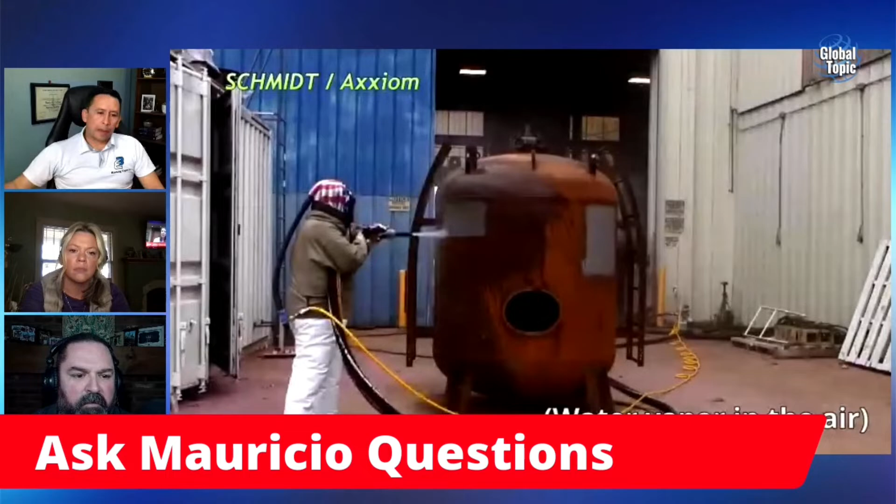And there are some big players in this business, dry blasting and wet blasting. And we are married with Schmidt, who is one of the leaders around the world. So what they did, they built a unit. Maybe you have a video. Yeah, let me bring the video up here. And so we're watching here. Go ahead, cover this.

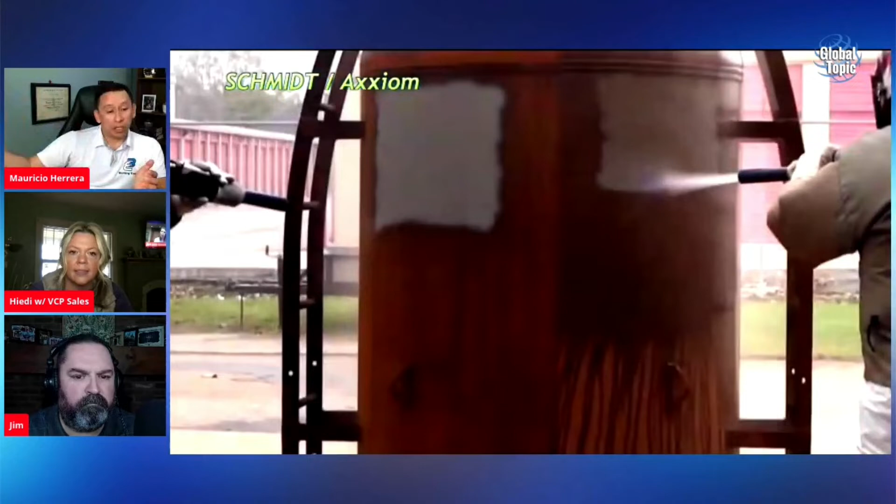Absolutely. So what we are showing here is just a guy doing wet blasting, and it's beautiful because no dust. The speed is the same as dry blasting, and the process happens just as you do dry blasting. Then he will show dry blasting on the other side, and here we are showing both at the same time. With dry blasting, you can go a little bit faster sometimes. It depends more on the expertise of the operator. Basically, it's the same. But then what happens after is what you need to really think about.

Because with dry blasting, you will be basically ready to paint. With wet blasting, you will have the flash rust. And then you will have to deal with it. Your inspector will have to test and tell you if it's acceptable or not. The supplier of the paint, usually they are very picky about it because obviously the adhesion and all the things that they need on the surface could change if they have corrosion on the surface. So those are the things that you have to keep in mind.

And so these guys from Schmidt, they were smart, and what they did was to integrate one standard blasting pot, the most popular they have, and they put an extra system that allows the machine to do wet blasting or dry blasting. So it's a perfect combination because with that machine, the contractor will try to do as much as he can dry blasting, but in case he needs to do wet blasting, then he just moves one little button and does it.

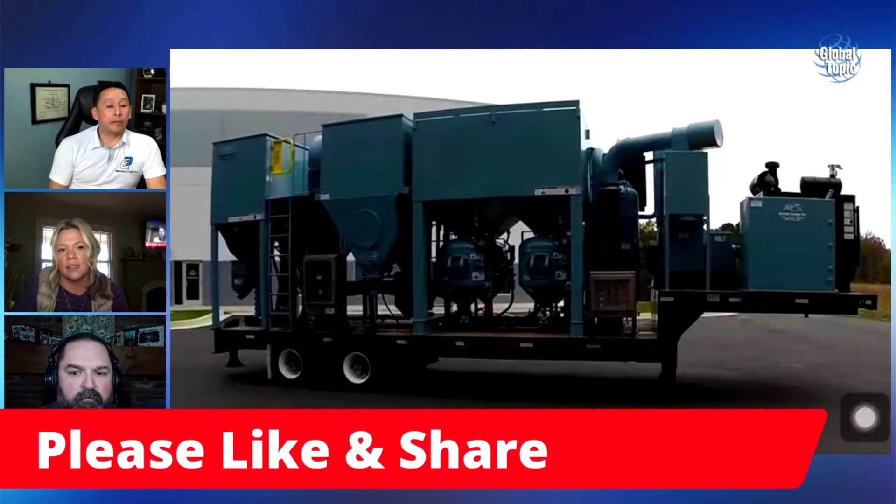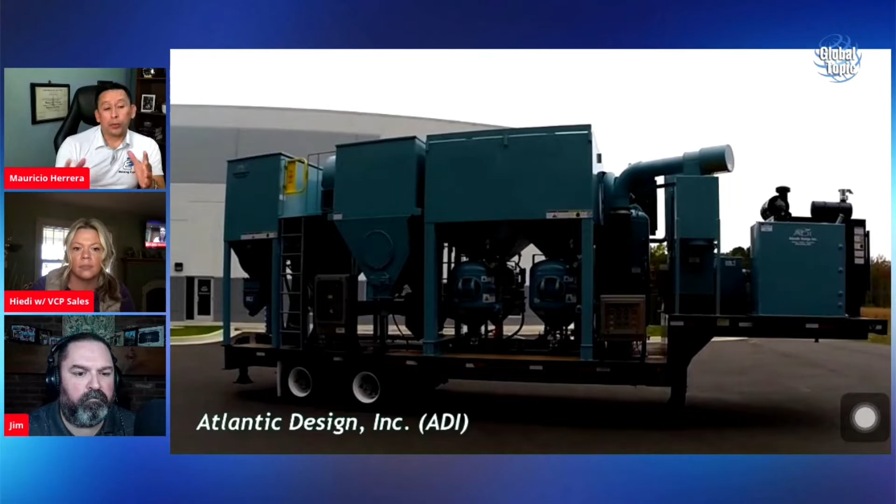So, looking at the aspect of mobile systems, I have a video here from you regarding ADI's trailer. Would you want to go through that as well? Yes, because when you use dry blasting, then you will have the challenge of abrasive. What to do with those big amounts of abrasive that you need. But in the market, now we have big pieces of equipment, beautiful equipment like this trailer, produced by Atlantic Design, where they put together a high-performance blasting pot.

Then they have a pump that will do the vacuum for you, so you can have 2, 4, 6, 8 operators doing the blasting, and 1 or 2 vacuuming all the material that they are throwing. The machine cleans the abrasive automatically and puts it back into the blasting pot, and all the dust created is separated into another compartment.

So with this kind of unit, you basically connect your compressor to it, and then you have 4, 6, or 8 operators to do the job. This kind of machine is used for big projects such as storage tanks and big vessels, but it always depends on the main factor, which is investment.

So people have to balance this out and say, okay, do I have enough money in this project to invest in this kind of technology, or do I have to go with wet blasting, dry blasting, and an alternative abrasive. Those are tough decisions for people that don't know much. So it's important to have all the information available to make a smart decision.

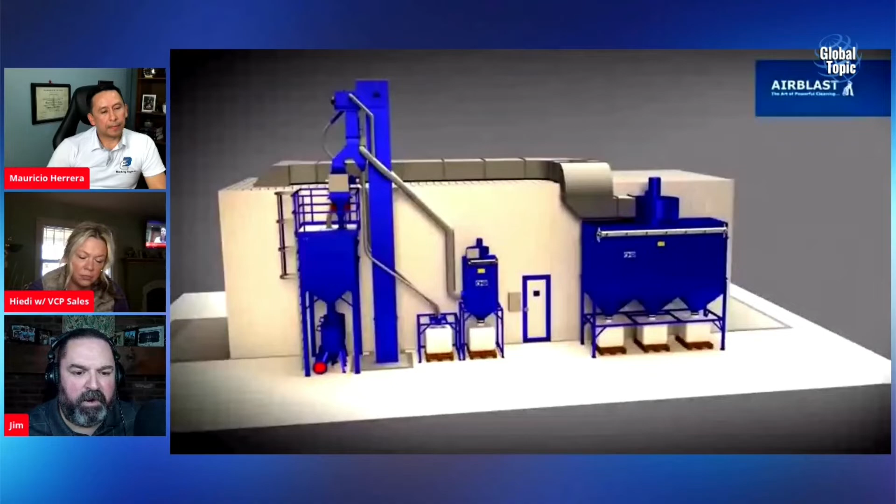So in addition to that, the other thing I'd like to bring up is, obviously, blast rooms as well. Absolutely, yeah. When you're in a big project, you don't need to do everything on the job site.

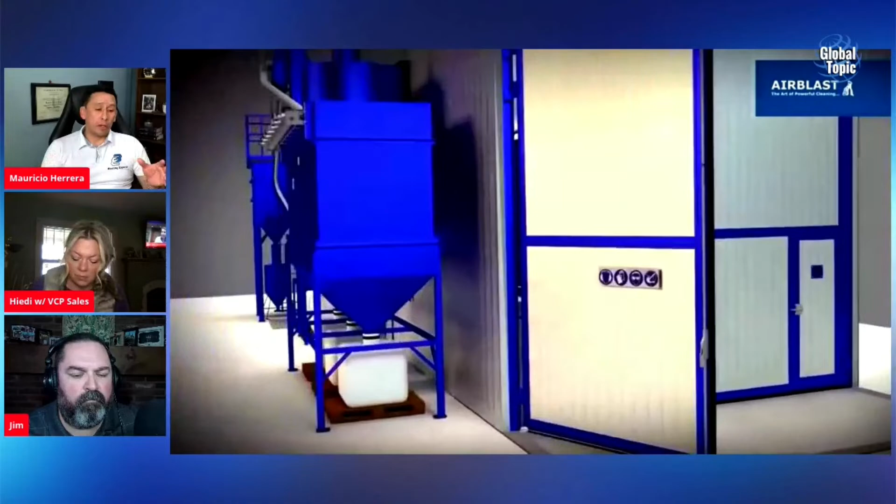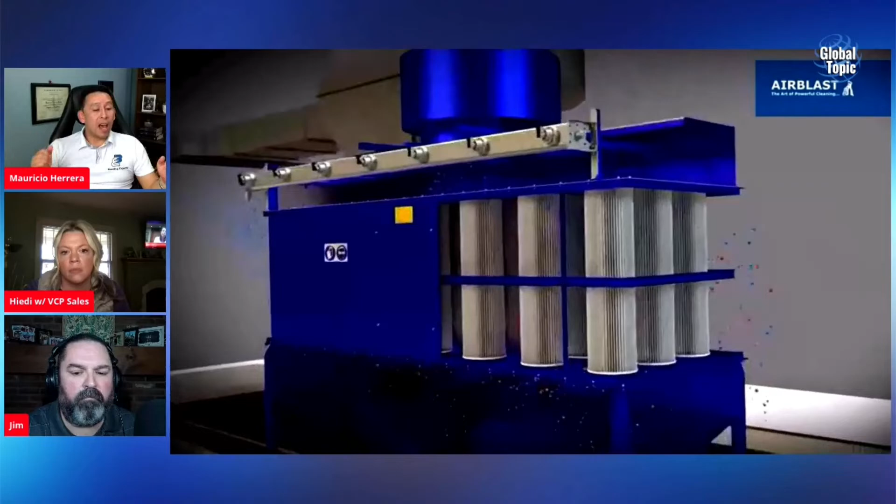You can actually prepare those components inside, at your facility. In those cases, we always advise owners to invest in a unit like this, where you have a cabinet with all the components, the dust collector, the recycling system, everything in it, and then you can use steel shot and steel grit, because that's one of the keys.

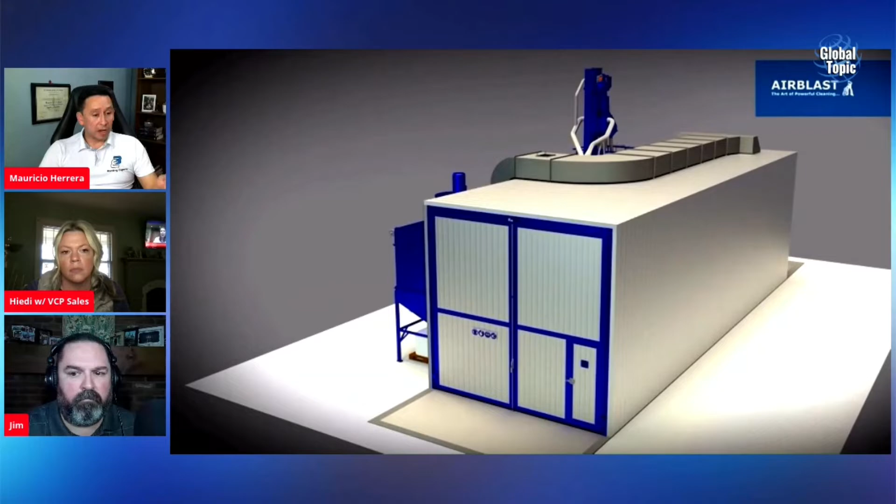Whenever you can use steel shot or steel grit, mostly steel grit when you are doing hand blasting, you will have the opportunity to reuse that material hundreds or thousands of times. So the investment in abrasive goes to a really low price compared with sand or any other abrasive.

So these rooms are a perfect solution for a big manufacturer who needs to prepare components before they go install them. Absolutely, very good.

Very good. The other topic I'd like to cover, or have you cover, is regarding water jetting. I encounter that a lot in certain specifications, and I know in Latin America it's used a lot. Could you talk a little bit about water jetting?

Absolutely. Similar to wet blasting, they have been taking advantage of new coatings and inhibitors, but this specific technology is used when you have thick layers, let's say more than 20 or 25 mils. With a process like dry blasting, it will take forever, or sometimes it's even impossible because it really melts. When you start blasting, it melts and it's hard to remove.

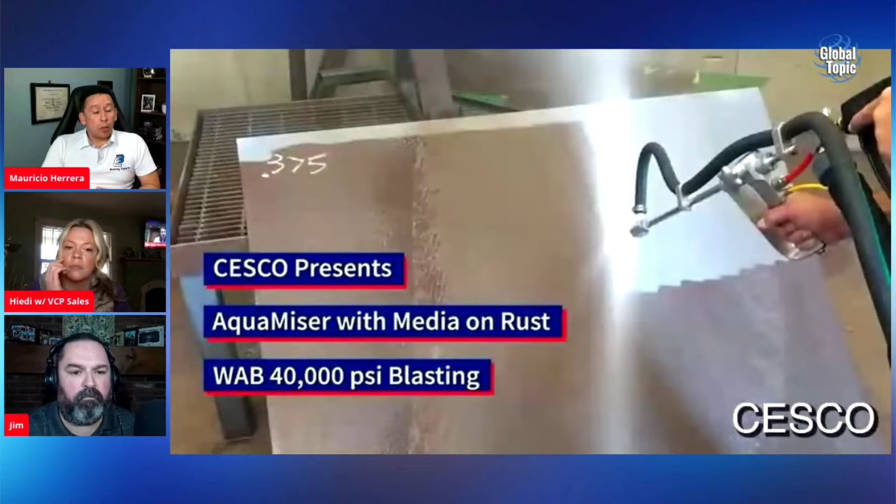So those are the kind of opportunities when you use water jetting. And for water jetting equipment, there are some big manufacturers of this technology here in the US, and also in Germany, and even in Brazil there is one as well.

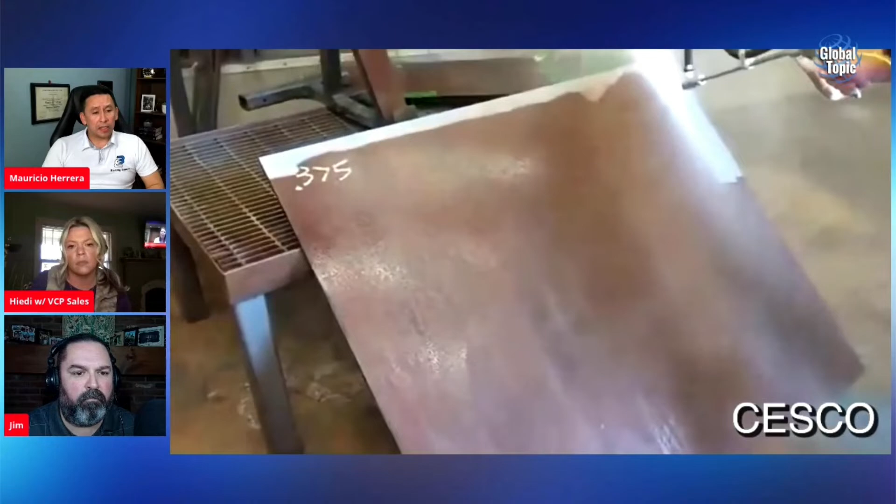We were looking for the right supplier, but we were lucky to find the Fulmer family in South Carolina, the owners of CESCO. They did something really smart—they had been doing something similar to blasting experts, selling technology for surface preparation. So they understand perfectly what dry blasting is, wet blasting, and water jetting.

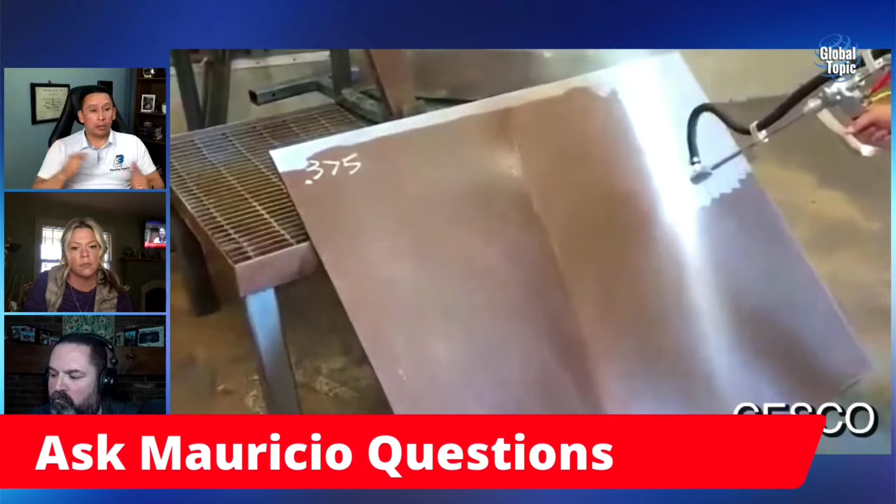So what they do is offer water jetting equipment. And you know that with water jetting, you can shoot at 5K, like 5,000 PSI, 15,000 PSI, 30,000 up to 40,000 PSI. With that pressure is where you can do basically everything—you can remove whatever you want.

But the challenge is that water cleans but doesn't penetrate steel, so you cannot create profile. So what AquaMiser, the division for water jetting at CESCO, did was combine dry blasting equipment, a blasting pod from Schmidt, with the whole pressure system, and integrated it with the water jetting equipment. So now they have a machine that, if you want to do just water jetting at 30,000 or 40,000 PSI, you say water jetting. But if you need to create profile, you say let's use the injection system with the abrasive.

So that's the difference we offer compared with other manufacturers—that's the plus part we offer to our customers, to have a water jetting piece of equipment, a good one, with the injection system on it, so you can create profile.

Mauricio, when it comes to larger painting projects, how can contractors minimize the starts and stops to control proper levels of abrasive media? Yeah, great question. That becomes sometimes the worst part, when you waste more time trying to load abrasive to your blasting pods.

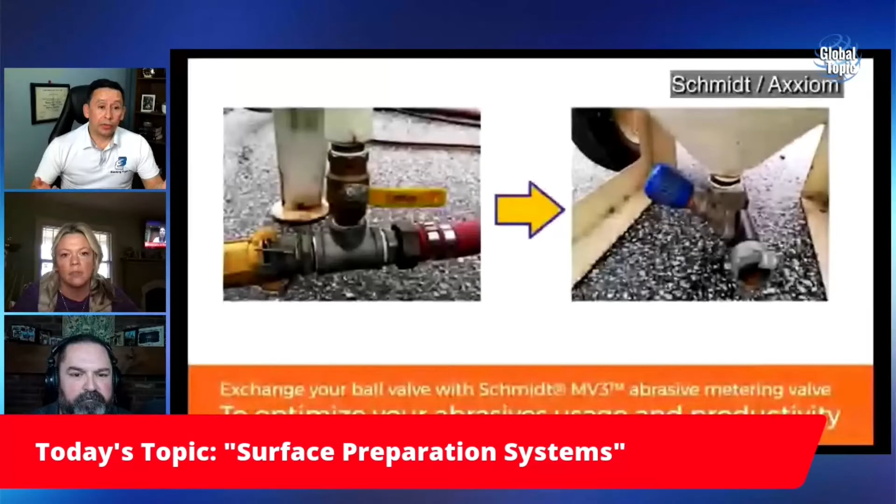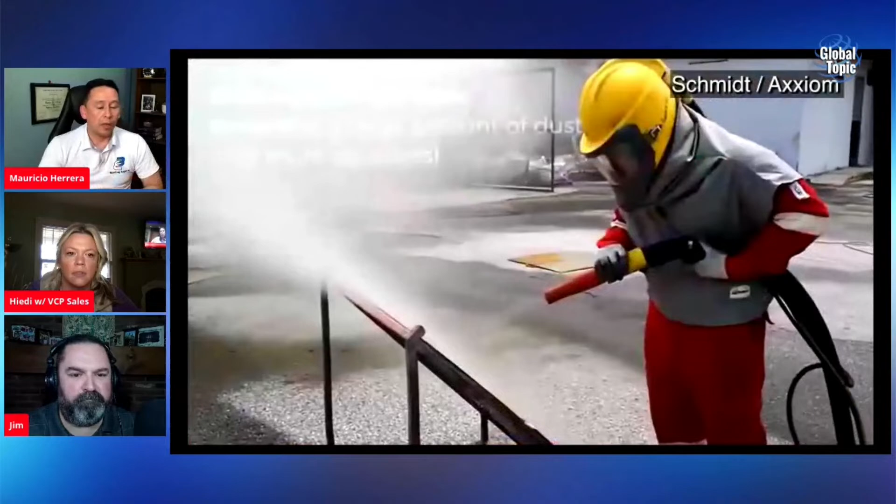Absolutely, so everything goes together. That's one of the things that when I was trying to prepare what to say in this live, I was going through the history of our company. One of the best things that happened to us is we didn't have to go to university to take classes, because we got the opportunity to get trained by the manufacturers. We got training from Kennametal to select the right nozzle, and training from Schmidt to understand what you can or cannot do with a blasting pod and what systems are available.

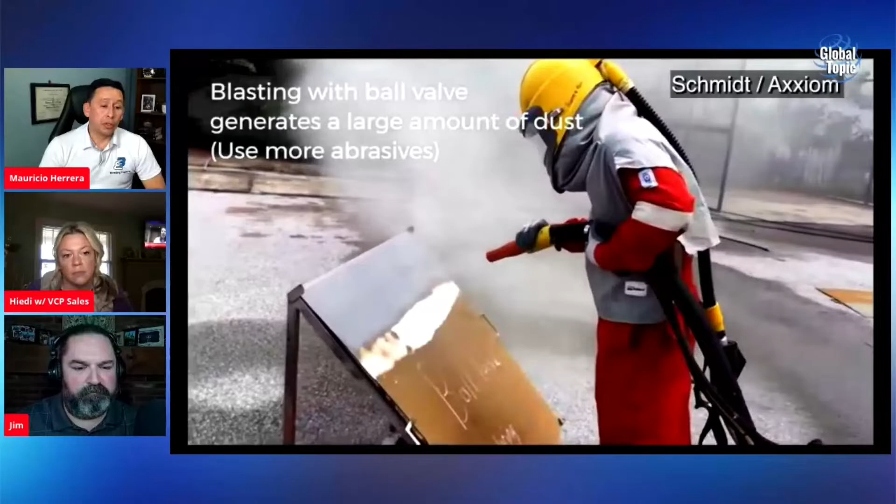We learned what kind of PPE to use, basically everything. And one of the things is that abrasive, you decide what kind to use depending on what machine you are using, or what the specification says about pollution, or what kind of profile you can create. So there are different parameters that help you decide that.

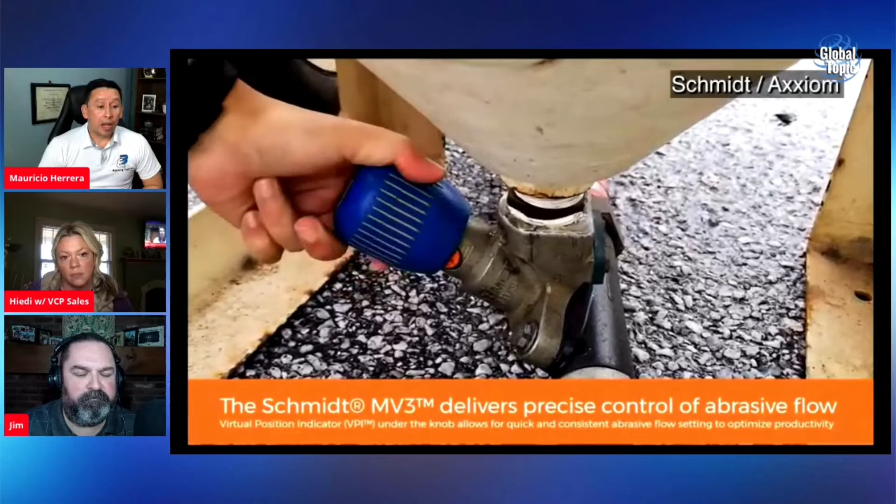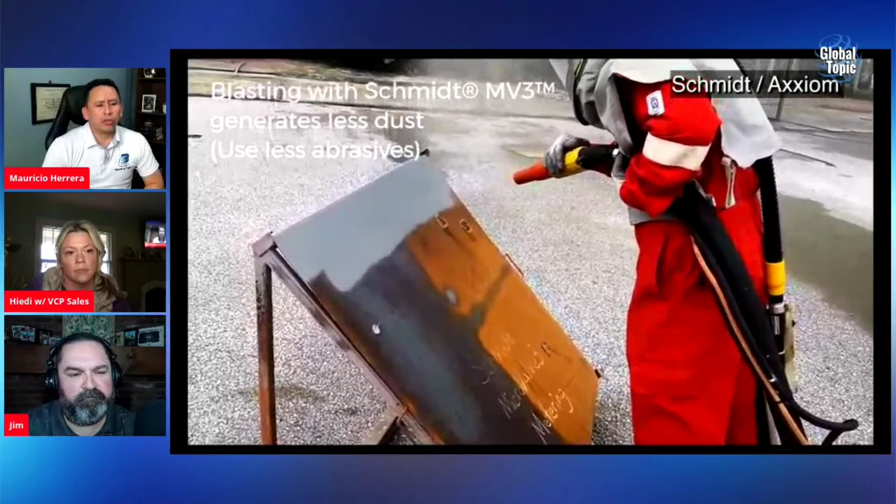Obviously the first one is the profile that the coating supplier requires. Usually a typical one is in between 2 and 3 mils. So with that information you say, okay, I can select. If I am using grit, I will go with a manual process, I will go G25, grit 25 size. If I go with Black Beauty, I will say medium size. So with the profile, you decide what size.

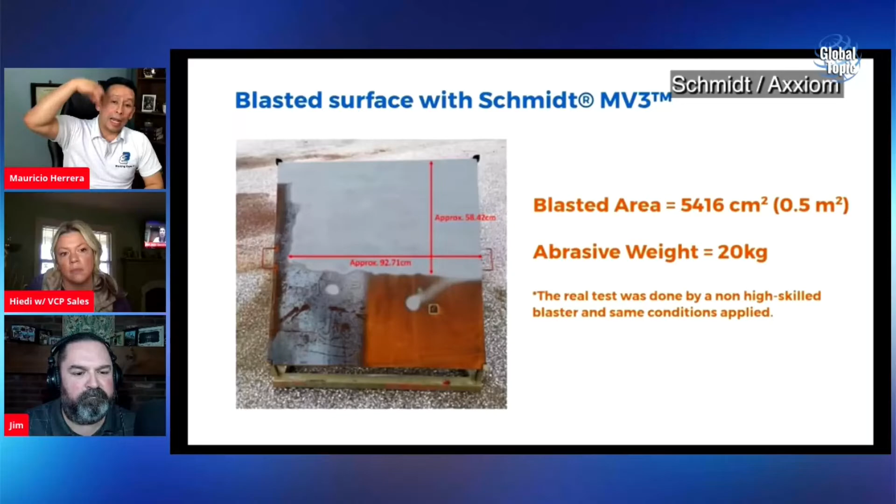But then with the equipment you are using, you decide what kind you're using. If you have this trailer option that Jim showed us before, you will go with grit, still grit, because you will be throwing, vacuuming, cleaning, and throwing again, so you will have hundreds of times to reuse it. If you don't have those systems, then maybe you will go with Black Beauty, you'll just throw it once and keep going. So it depends on what kind of equipment you have and the specifications the owner decides for the project.

You truly are an expert. Oh no, that's a beginner. I feel I need 50 more years to learn all the things out there, because there's a lot of information. Jim knows how much information is out there, so it's a pretty extensive topic.

ROI speaking, a lot of these decisions are based on return on investment. Have you performed or done any financial analysis for these? Yeah, I like that kind of question because that's what most people do, so that's what we do. I have a good example for it, especially for our Latin American customers, who are used to using sand and don't want to use a blasting pot that is certified.

They just go to their good friend who is a good welder and they build a blasting pot. So instead of investing maybe $3,000 to $5,000, they end up investing $500.

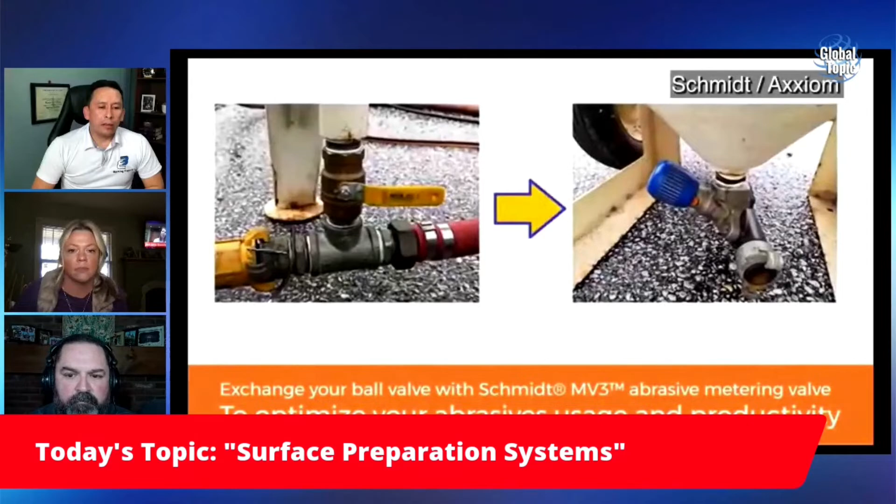Yes, that little part, the one you just showed. One little difference, and you can stop the process right there. Stop it a little bit before, right there. So we have a blasting pot that was made with, as you can see, a water valve.

And then they have a T under there to get the air and then the abrasive from the blasting pot. It works. That's the problem, that it works. You can do blasting with it.

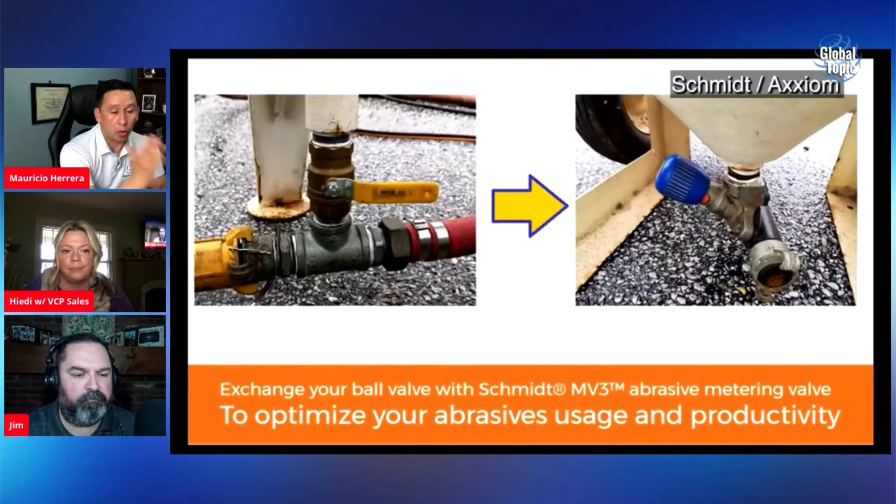The problem is that if the operator is lucky, instead of doing, let's say with a nozzle number 6, he can do maybe 1,000 to 1,200 square foot. Normally they can do that if you have the right compressor, the right dryer, the right blasting pot, and the right components. But with a machine like this, you will be lucky if you do 600 square foot.

So when you do the math, 600 versus 1,000 - 400 foot of work could mean $200, depending where you are and how much you are charging per square foot. It could mean $200, $300, $500 per day.

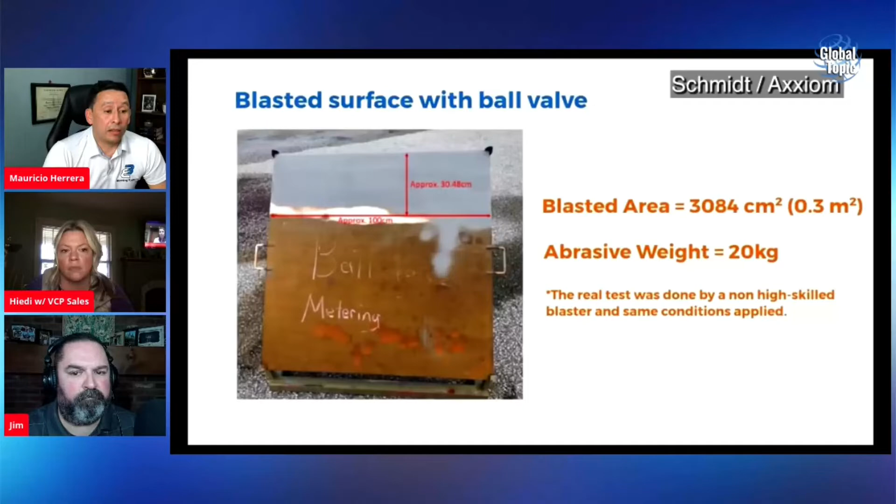So basically, in one week, you can recover the investment of a certified blasting pot instead of the one you decided with your friend.

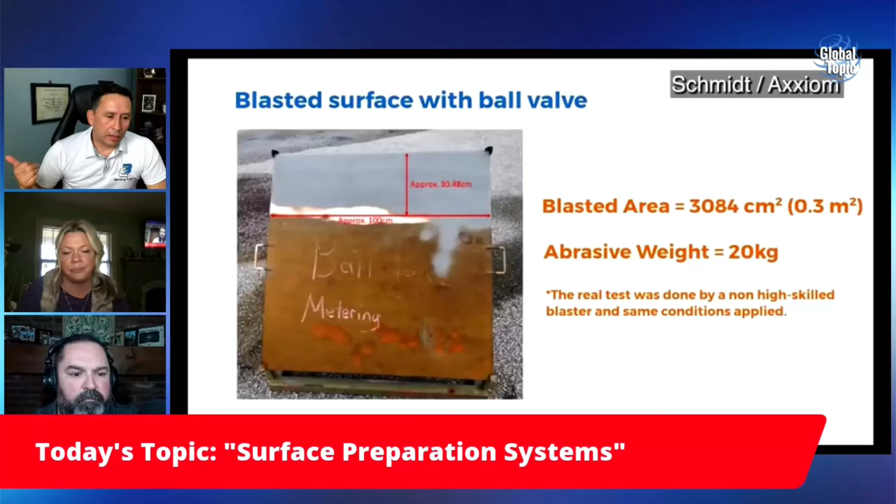And then safety, that's another big thing in this kind of products. The blasting pot that your friend built for you, there's a chance it will explode and kill someone, and then you finish everything, right? You'll end up, I don't know, in jail. Lives are invaluable.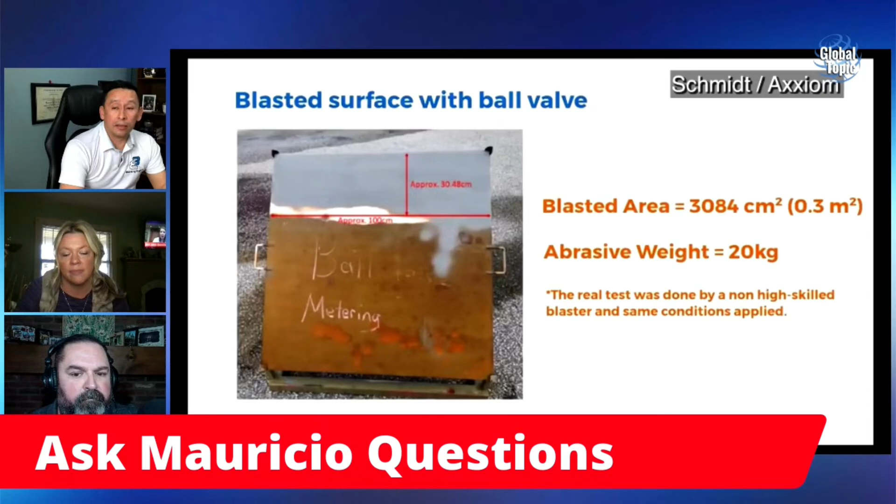Yeah, so if you use a certified blasting pot, you know that these manufacturers go through all the process. And what I like a lot is that in North America, manufacturers have to follow procedures and standards, and they cannot just come up with any solution - it's something that is certified.

Something that video shows as well is the amount of abrasive you can use. With a normal blasting pot built by my friend, I could spend twice the abrasive I'd spend with a certified blasting pot. So those kinds of analysis, we have detailed numbers and examples to show our customers - that's what we do for return on investment.

Very good. The one thing I think before we end this stream, we should talk about safety and talk about PPE. Would you like to go through it? I'll bring up the clip we have here regarding configurations.

It's great that you include this topic in this slide, because sometimes owners and contractors get really excited about the equipment, abrasive and everything, but they forget about their people - the most important thing they have in their company. And PPE, luckily for everyone, there are companies developing accessories to help.

And there are also standards that people have to follow. That's a challenge we have in Latin America, but with the good information we are promoting, and with institutions around the world that promote safety, it's a lot easier.

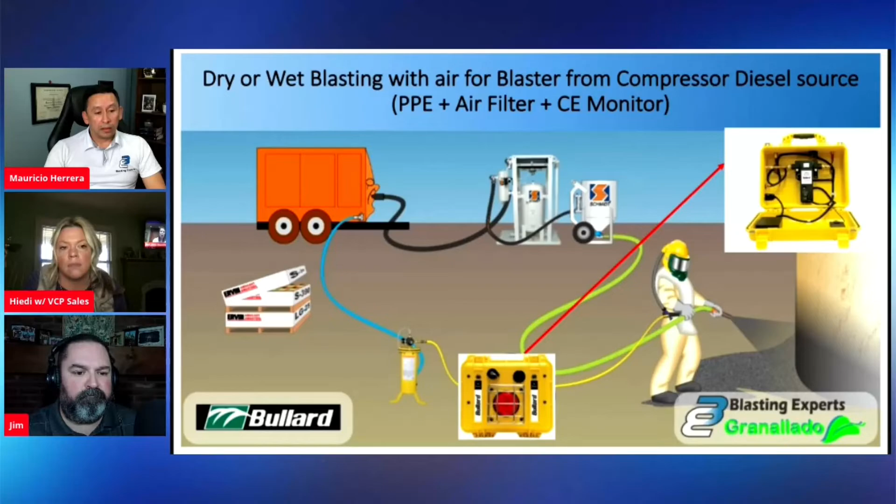So the best is to use this respirator, this helmet. They come with this hose that is feeding them good air. We call it air class D. That is the one that you need to breathe normally. And then with this kind of helmets, the operator is basically with the ventilation system working, no problem. One thing I like about Bullard is that this helmet weighs a little bit more than 2.5 pounds. We have some others that weigh up to 5 pounds. So that is what I promote in these cases, light helmets.

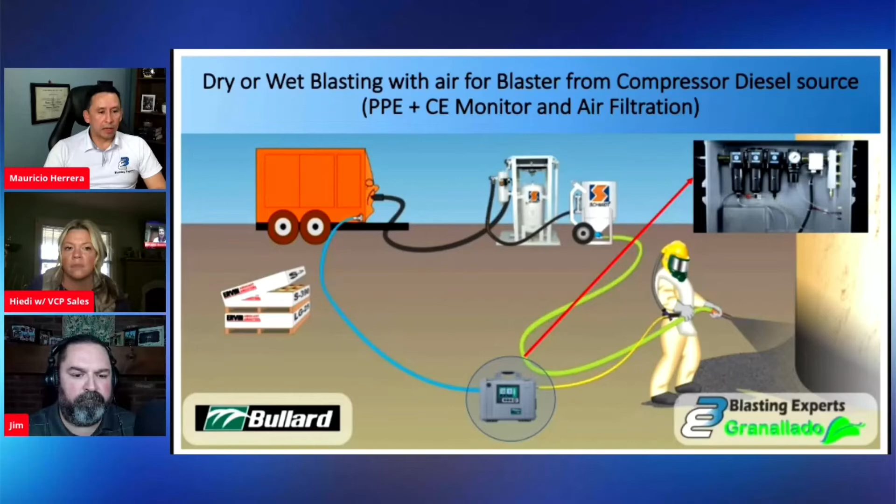And then you have also the blasting suit that will protect you from the rebound, and obviously your safety shoes and your gloves. So that's basically the PPE. This is one of the configurations. We have another one here that Jim is showing. So instead of installing a filter and the CO monitor, we have this box now, a new one. It comes with everything. It has all the filters inside that will clean your air, and it has the CO monitor that will tell you what happens. And it comes with a screen so anyone is able to see anytime what is happening and tell the operator that everything is safe. And if the CO level is too high, it will sound an alarm and will stop the process. I don't know if you have another one there, Jim?

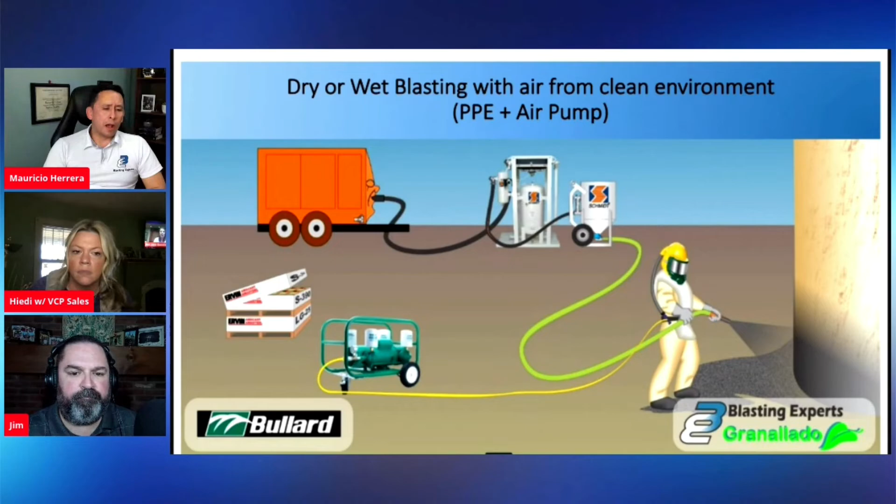Yeah. So this one is even better. So the contractor knows that his compressor is quite old and it can produce problems, right? So he said, okay, I'm going to install a pump. This one is an electrical pump that will take the air from the environment and will throw it to the operator. And if you show another one that you have maybe there, Jim, in cases where the air that you are sucking with this pump and throwing to the operator, you are not sure if that's safe, then you put this box here to make sure that you clean it, and in case you have any contaminant, it will inform people that something is happening. So those are basically the PPE solutions we have for surface preparation.

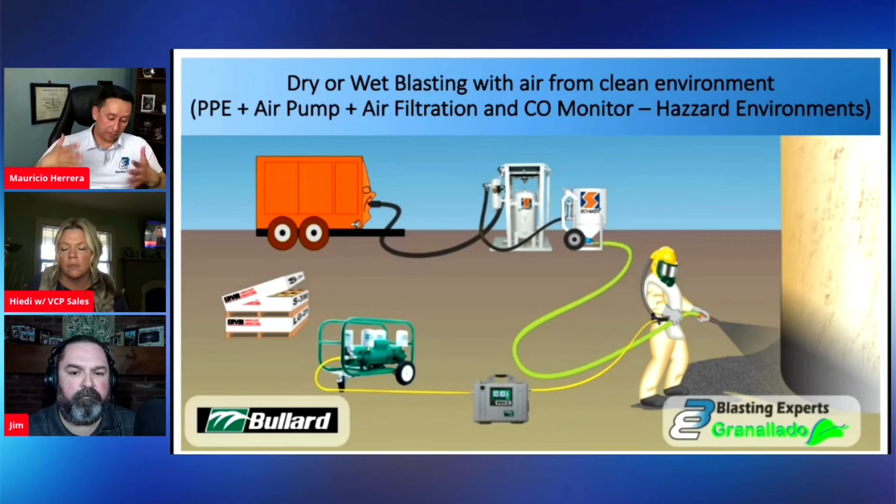For water jetting, things are similar. The difference is that you are working with 40,000 psi, so the protection for the whole body, your foot, your hands, everything is with a special material called Kevlar. And then it's a special suit that you have to buy in case you are using water jetting.

Very good, very good. What a great stream we've had. Like I said, we could go on probably for 4 hours on the topics, and we've kind of scratched the surface on a lot of this. In closing out the stream, Mauricio, is there anything that we did not talk about that you would want to leave with the viewers?

Yeah, well, one of the things that we learned from day number one when we started Blasting Experts was that we need professional education. We were lucky to have suppliers that gave us basically a master's degree in how to select and use nozzles, hoses, connectors, even connectors, Jim. You know how important it is to choose the right connector between your blasting pot and your hose. You can lose up to 2 psi if you select the wrong one. So we got the opportunity to learn all of those, how to select and use blasting pots and big machines. I don't know if you have the other video for the blaster.

Maybe you don't. The blaster machine, the one that cleans tanks. Oh, yes. I apologize. Let me bring that up. Very good. Yeah. Actually, that's a great one to watch. Yeah, that one. So we were able to learn from blasting nozzles up to robots. And it is great.

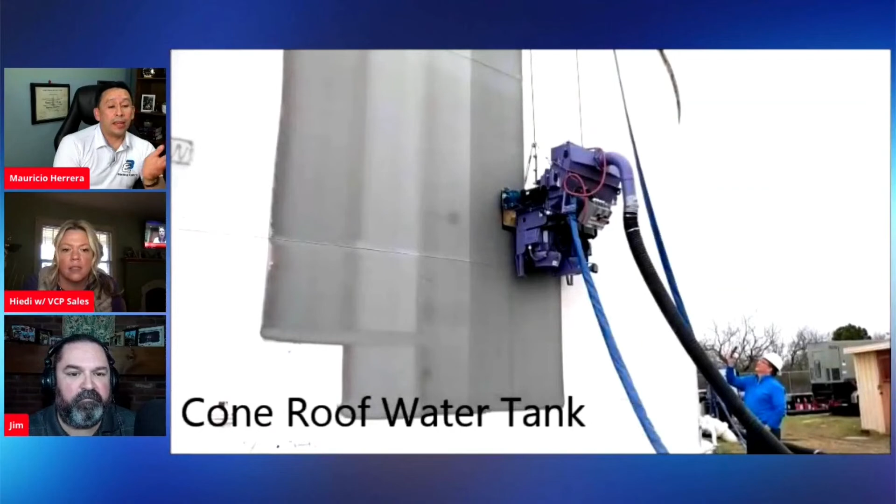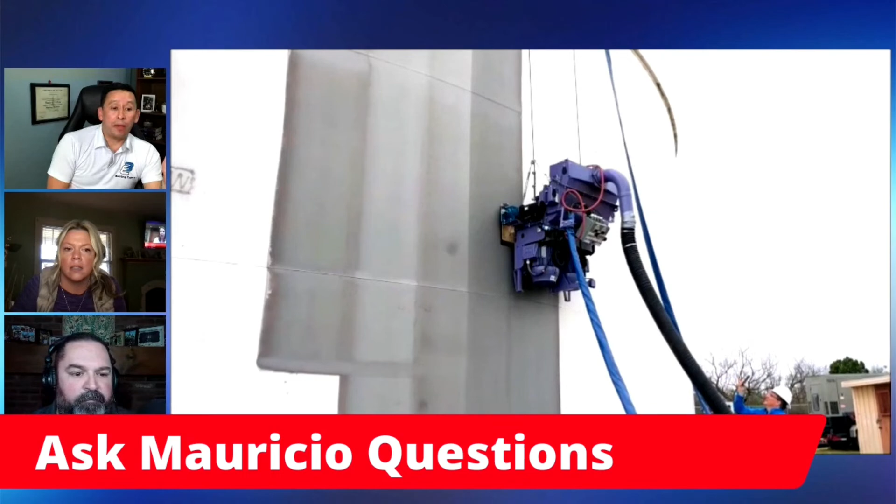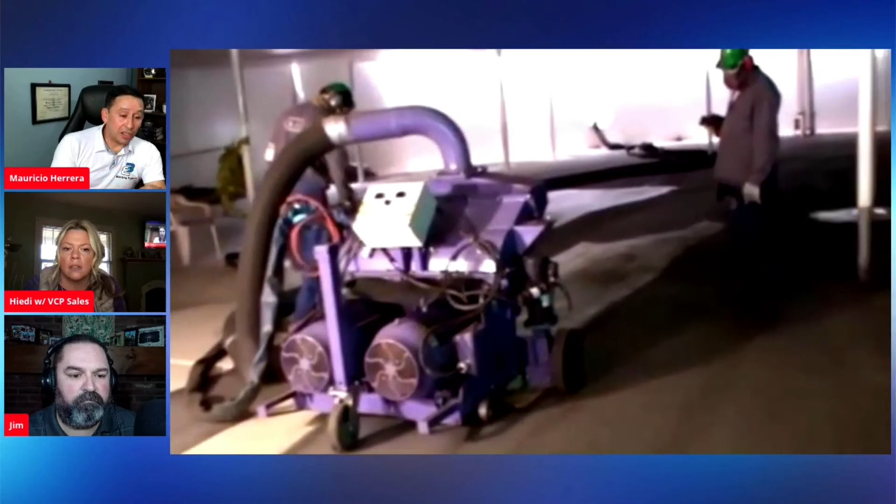This is one amazing technology that is available for big areas such as storage tanks, or if you have a big wall or a big vessel to clean. Then you can use, in this case, a steel shot, a machine that doesn't create any dust. With this one, you can do vertical or horizontal. You can do roofs on top, or you can do the floor as well.

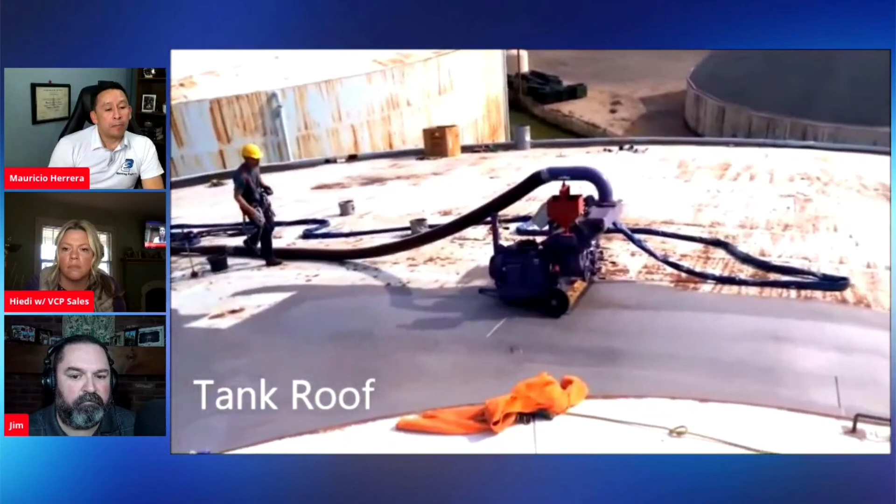So all of these kind of units, we were lucky to get training, and we constantly get training from them of whatever they are changing. But for the rest of the people, that's the challenge. And that is why we got involved with SSPC 14 years ago. We are actually corporate members.

And in my case, since I'm Colombian, and I know the industry in Colombia a little bit better than in some other countries, I was lucky to get the support from more than 40 professionals, people that could be my grandparents. They have more than 40 years of experience in this business. But I told them about the opportunity to bring SSPC to Colombia, and they named me as the chair for SSPC Colombia, and we help people to understand and learn what is the mission for SSPC, what are the certifications available,

and now with the merge with NACE, with AMPP, people are very excited and really interested to take training, even though this is not new. And it's something funny. In Latin America, we are not maybe the best users for technology, but we like training. So I don't know, Jim, if you have seen it, but you go to Peru, Argentina, Brazil, Mexico, the amount of inspectors, the amount of people that really understand and know about it is amazing.